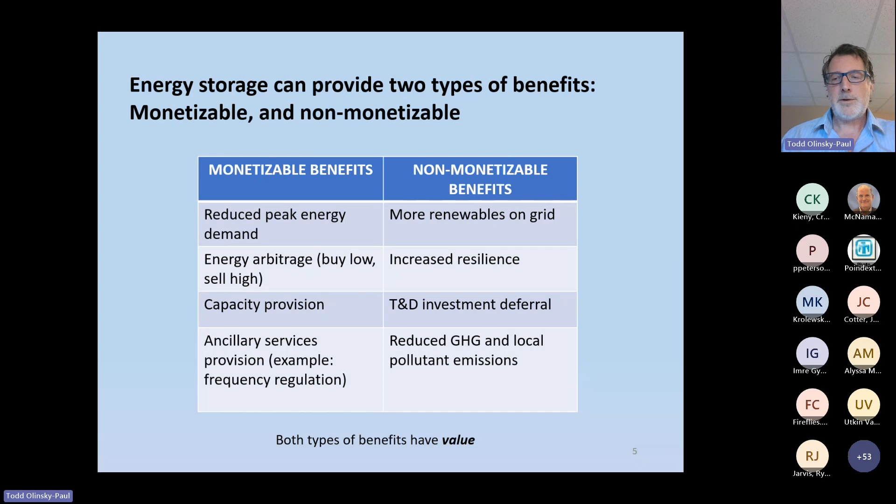The important thing here is that both types of benefits have value. Whether it's monetizable or not, it still has value. When we look at benefit cost analysis, it's important to consider all the costs and all the benefits. The problem is that when storage has lots of non-monetizable benefits, those benefits tend to get left out of the calculations.

So we know how to value some benefits better than others. It's easy to put the monetizable benefits on your cost-benefit balance scale, but it's also unfortunately easy to leave off the ones you don't know how to monetize and you're not sure what the price should be. So we need to understand that value doesn't equal price, and that failing to assign values to non-monetizable benefits is the same as assigning them a value of zero.

In other words, when you do a cost-benefit analysis or calculation—and this is usually done when you are looking at whether to adopt new programs and policies—you want to know whether your tax money or your ratepayer money is being spent wisely. So you do a cost-benefit analysis.

If you don't assign a value to those non-monetizable benefits, then they default to zero in that analysis. So a low estimated value is better than no value at all.

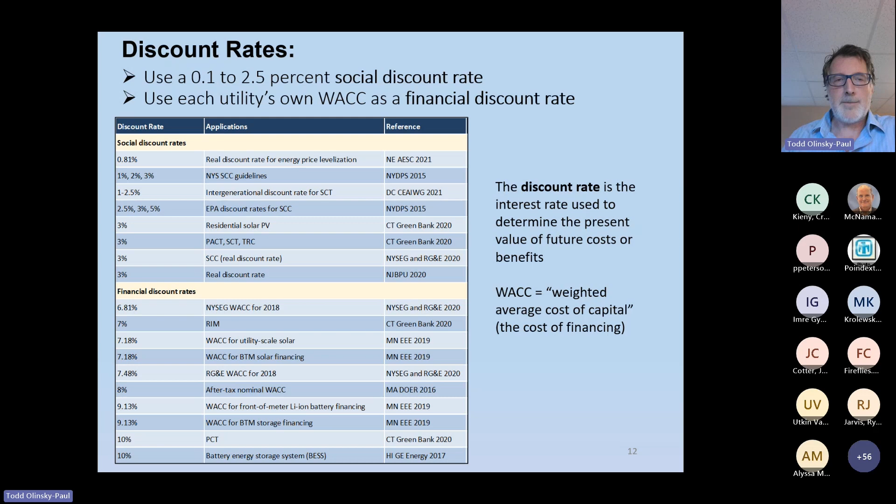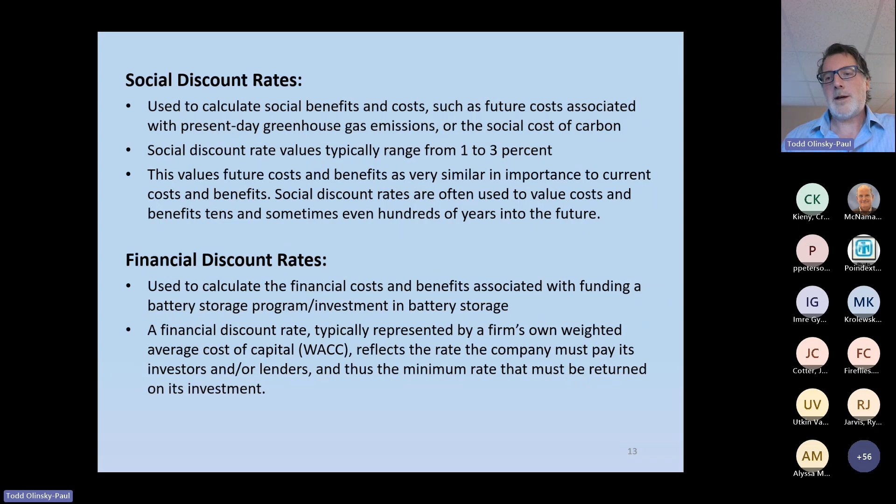Here's a little summary of what each of these entails. Social discount rates are usually used to value costs and benefits in 10, 20-year increments, even hundreds of years into the future, while financial discount rates are generally represented by a weighted average cost of capital. It reflects the cost of financing, which relates to what utilities need to consider if they're an investor-owned utility. I'll leave it there for this topic. If you need to get into the weeds on this, I'd be happy to answer questions, and I can refer you to the report, which has a lot more detail than I can get into right now.

Benefits to be considered. ACEEE came up with a list of 25 benefits of battery storage, falling into various categories. There are consumer benefits, such as lower ratepayer bills and lower customer energy use. There are avoided system cost benefits, including avoided capacity costs, avoided transmission and distribution costs, and ancillary services costs. There are environmental benefits, such as reduced land footprint. If you're displacing peaker plant services by deploying battery storage, and you're able to put the battery storage into existing facilities, your footprint there is pretty much nothing, as opposed to a peaker plant's footprint.

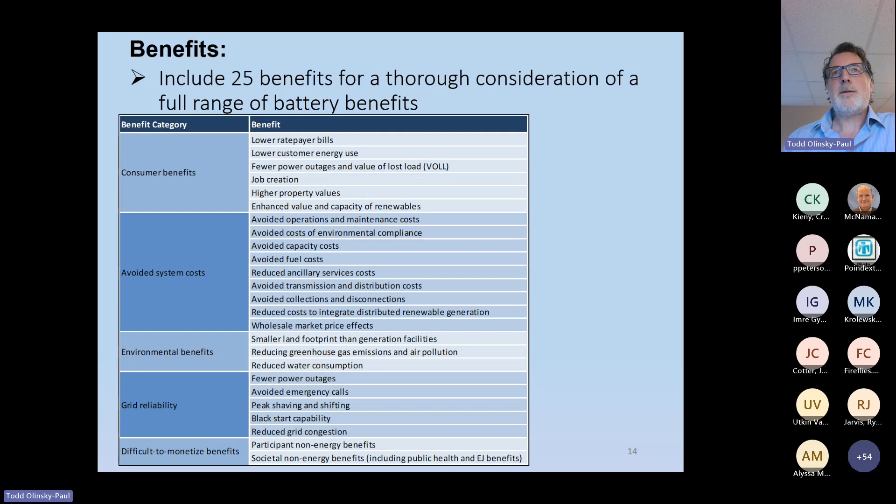There are grid reliability services, things like reduced power outages and avoided emergency calls. And then there are difficult-to-monetize benefits, including participant non-energy benefits and societal non-energy benefits, such as public health and environmental justice benefits. You're going to have different benefits considered in different tests. You may be able to pick and choose which benefits you think would be appropriate to consider. The recommendation here is to include as many of the benefits as you can, even if there's not a price signal and you're not sure what the value is. It's still important to include those benefits as well as all the costs.

So the costs. The basic recommendation here is to use up-to-date battery-specific engineering references to establish correct program costs. There are different kinds of costs: administrative costs, capital and labor costs, program operation costs. I won't get too much into this. The cost side is usually a lot easier to quantify than the benefit side, because we know what labor is going to cost and what administration is going to cost and so forth. It's a lot harder to figure out how to value, for example, environmental justice benefits, but it's important to try.

Sensitivity analysis. A battery-related benefit cost analysis should conduct several sensitivity analyses for two things. One is model calibration, which is to fine-tune the model results based on adjustments to input assumptions. The other is the full model results to capture uncertainty. Sensitivity analysis tells us how sensitive your analysis is to the assumptions you're making, and allows you to weight various inputs and so forth.

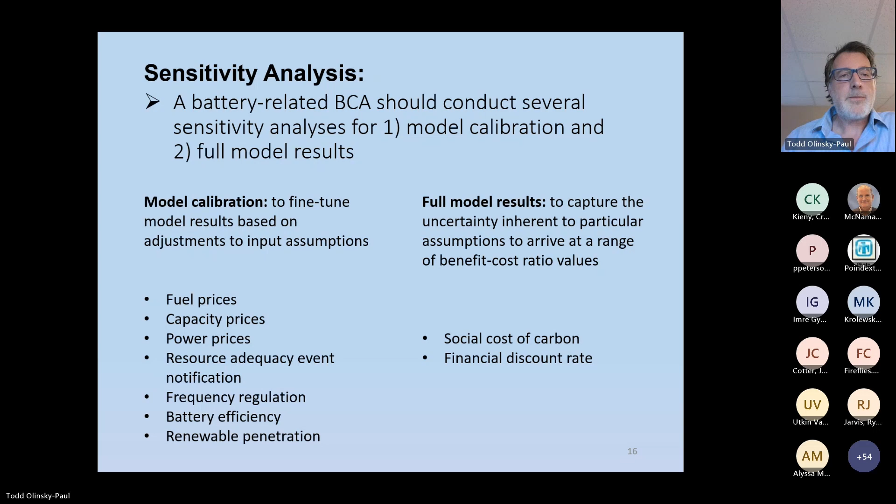Finally, the stakeholder process. It needs to be inclusive, diverse, and equitable. It needs to be a start-to-finish stakeholder process during the benefit cost analysis, and should include representatives from a wide range of stakeholders. This is important because it can really help identify battery performance information, data, market drivers, deployment barriers, develop appropriate peak load forecasts, costs and benefits, etc. The more voices you have at the table early on, the better off you will be.

So here's a summary of the recommendations. I won't go through this since I just did.

So I'll talk a little bit about energy storage applications first. We typically categorize it into two categories: power and energy applications. For power applications, we generally demand a huge amount of energy in a really short time from the storage—those are the power applications. Some of the more common power applications are frequency regulation and voltage support. I'll talk a little bit about each of these applications first.

Frequency regulation: due to the constant variation in load and sometimes generation, the frequency of the grid fluctuates continuously, so we have to regulate that. We have to keep it as close to the nominal value of 60 hertz. So we can use storage to do the regulation.

Then voltage support—we also want to keep the nominal voltage of the system close to the 1 per unit value, and storage helps with that. Then there's small signal stability, where if there are small disturbances in the system, the storage can step in, provide active power and balance that out. Then renewable smoothing, the storage helps in mitigating the variability of renewable resources like wind and solar.

Then there are the energy applications where we ask the storage to provide us with energy for a long period of time. Energy arbitrage is one of those, where you recharge your storage during periods of low demand when the cost of electricity is lower, and then during periods of high demand, you discharge it.

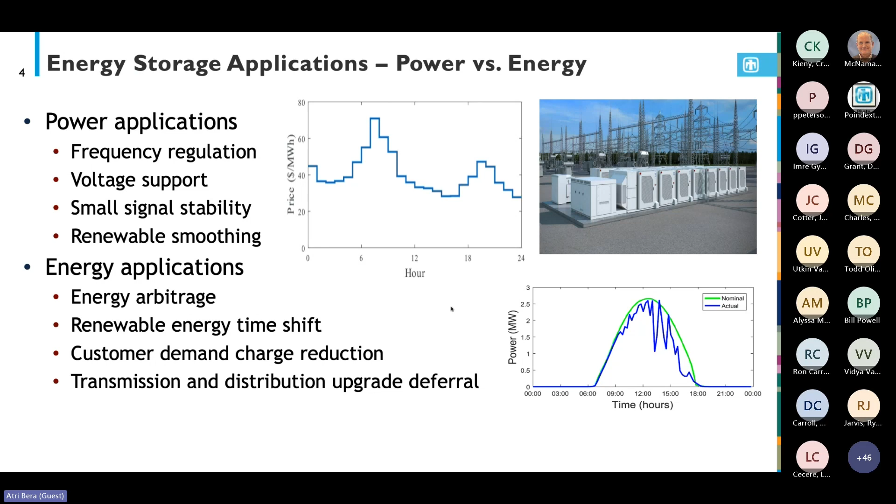Transmission and distribution upgrade deferral: sometimes it's not economically feasible, or we have other issues for building new transmission and distribution lines, so we can use storage during that period. We can also categorize energy storage applications as front of meter or behind the meter, based on the location of the storage in the grid.

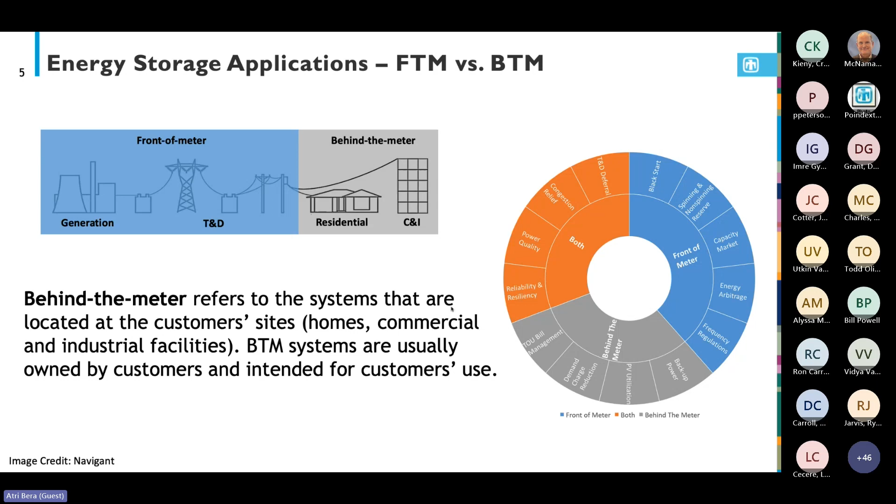So how do we go about doing the techno-economic analysis of energy storage? The first step is to identify revenue streams: what are the possible services or applications that an energy storage system can provide in a particular market? Then we select the right energy storage technology to provide these services, and evaluate the overall economic benefits given the limits in performance of the selected storage technology.

One of these is energy storage selection. The goal is, given a set of user inputs, we perform an initial screening to identify and rank feasible energy storage technologies for a given project. For example, the user input might be the grid location, application, system size, and discharge duration.

When we have these user inputs, we look into the energy storage technologies database that we have. Currently, for the technologies, we have several electromechanical storage systems like pumped hydro storage, compressed air energy storage, flywheels, and electrochemical batteries - sodium, zinc, flow, lithium, nickel, and lead batteries. We look at different parameters of these technologies like discharge duration, round trip efficiency, cycle life, depth of discharge, response time to full power, cost, and maturity level.

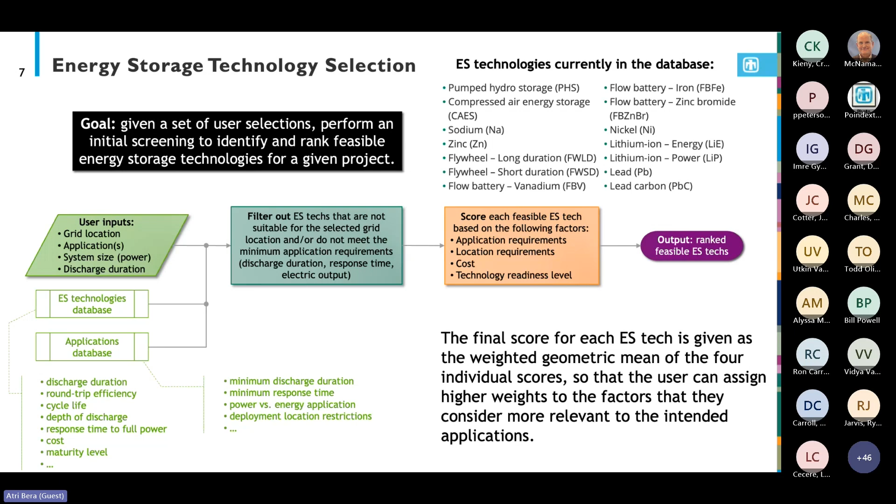So this particular Quest application filters those out, and of the remaining technologies, it scores each feasible energy storage technology based on several factors like application requirements, location requirements, cost, and technology readiness level, and ranks them according to the scores received. These final scores are calculated as a weighted geometric mean of these individual scores, and the user can also put higher or lower weights on these factors based on the importance they place on them.

Another important application that Quest can do is energy storage valuation. Given an energy storage device and an electricity market with a certain payment structure, how would the device maximize the revenue generated and provide value? Todd mentioned a lot of the factors that we should consider.

And there are several constraints that we have to put into place. First is the state of charge constraint, where we track the state of charge of the storage at every time period. If the storage discharges, then we reduce the state of charge; if it charges, then we increase it. We also put in state of charge limits, so we don't typically discharge the storage system completely or charge it to 100%.

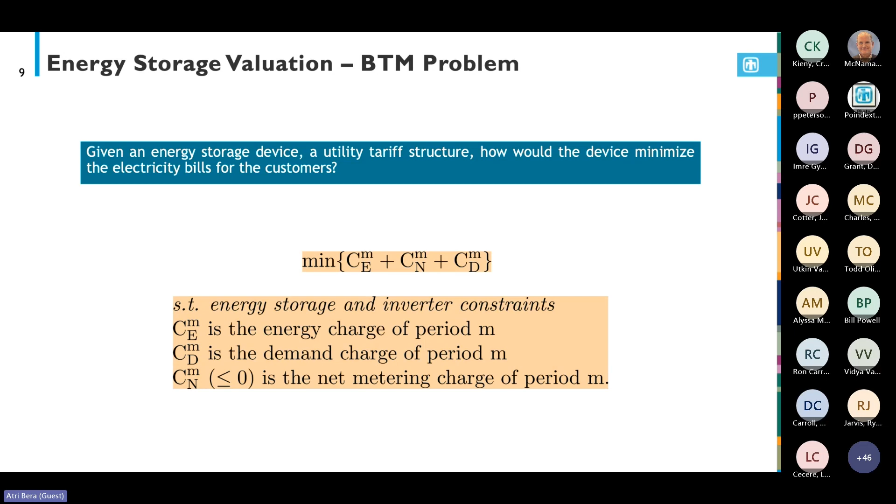There are two other applications I'm going to briefly mention: one is Quest Equity, and the other is Quest Performance, system performance. For Quest Equity, the problem statement is: given a peaker loading profile, what are the optimal sizes of PV and storage for a 1:1 replacement of that plant, and what are the benefits for the environment?

This tool, the Quest Equity tool, is currently under development. We have an alpha release, but we have not released it to the public yet, though it will be out soon. For performance, it's already a part of Quest, and you can use it right now if you want.

Given a charge discharge profile of a battery energy storage system, how much energy is needed to run the HVAC that maintains system temperature within its operating range? What is the optimal size of the storage considering the HVAC load? These are some of the things we try to answer with this application.

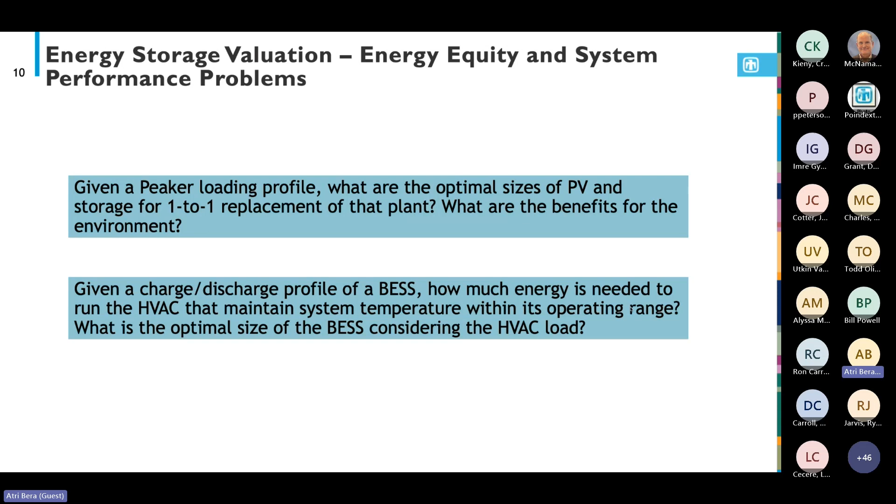Now that I've explained the models behind Quest, I'm going to talk about the tool itself, the platform, the graphical user interface, etc.

There are two versions of Quest right now, or one version but different installation processes. One is very user-friendly, hassle-free installation where you just go to our GitHub repository and download a zip file. If you extract the executable, you just double click on it and land on the home page, and that's about it. Then you can use the tool whichever way you want.

For power users, if you're proficient in Python and want to customize the programs or add more features to the existing code base, you can do that too. There's also a Python library we are working on, which is coming soon as well.

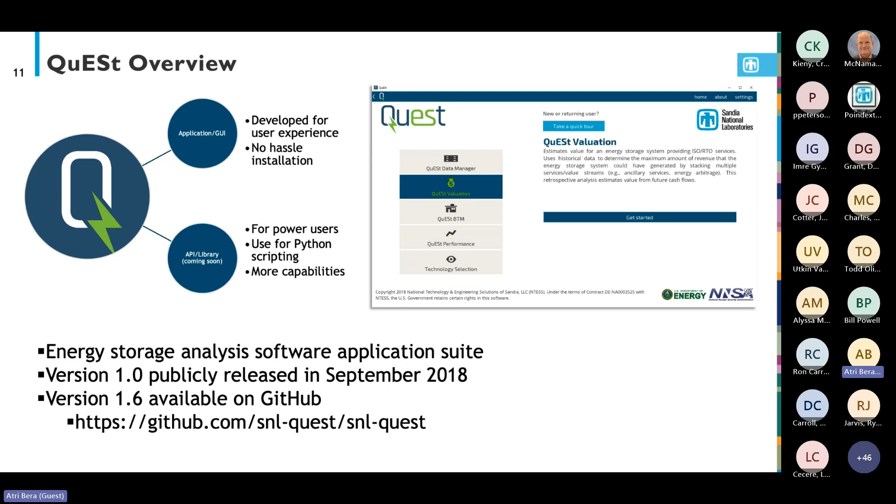A little history: version 1.0 was publicly released in September 2018, and the current version is 1.6, available on GitHub. I believe this link is not up to date because our entire repository was moved to the Sandia Labs repository—we don't have a separate SNL Quest repository anymore. I'll update the slides before Dylan uploads them to the website.

What are the current applications that Quest supports? I've already talked about this a little, but in the GUI you can see all these different applications. Quest Data Manager manages the acquisition of data, which can include ISO and RTO data, utility rate structures, PV profiles, load profiles, etc. Quest Valuation estimates potential revenue generated by storage by providing ancillary energy services in the markets.

We have Quest Behind the Meter, which estimates cost savings for time of use and net energy metering customers, Quest Technology Selection, and Quest Performance. The next releases would be Quest Equity and Quest Microgrid, where you should be able to size storage for microgrid reliability applications, voltage support, and several other things. These are all currently being developed.

So this is how a typical Quest workflow would look like. First, you decide what type of analysis you want to do. It can be valuation or behind the meter or others. Then you have to grab the appropriate data from Quest Data Manager, the RTO utility data or PV and load profiles, and then you select the application from the first step and use the data to run your analysis.

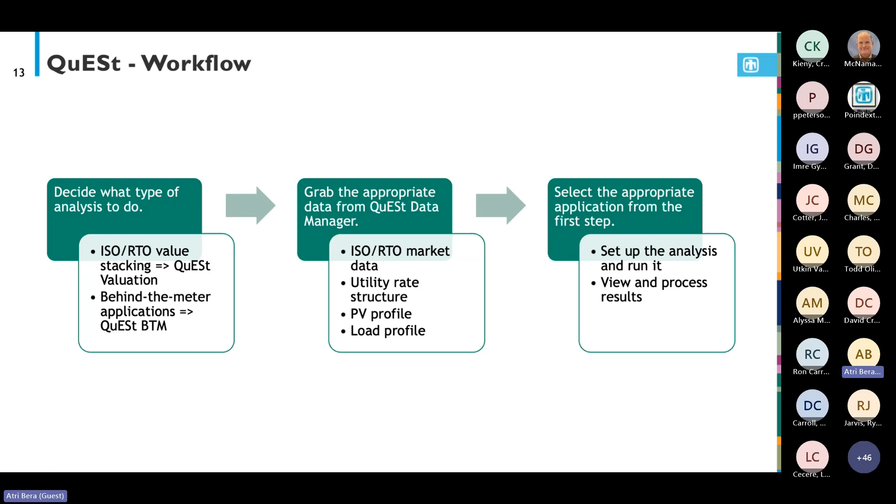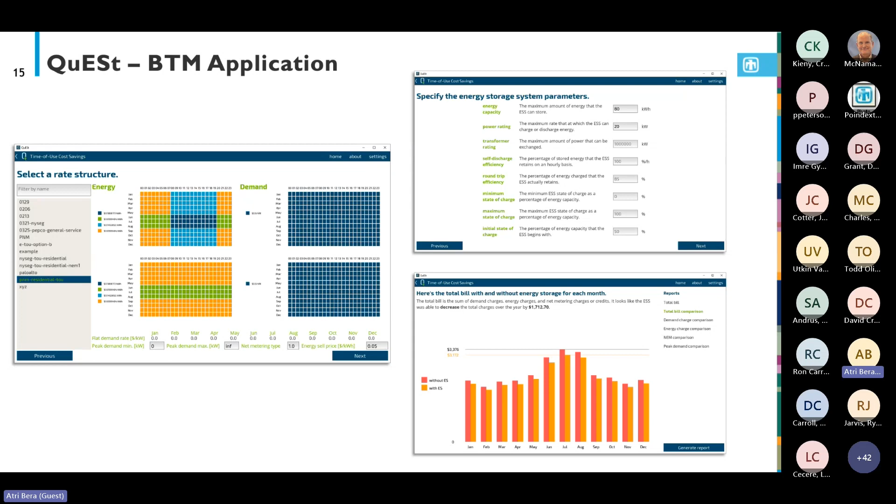So those were some examples, and currently QuESt is undergoing a large overhaul. We are moving towards QuESt 2.0, which will be more like a software platform rather than one solid software. This can be comparable to an app store for Apple or Android phones, where you install only the applications that you need. You don't install the whole software. So if you just need to do technology selection, you install that, or performance, you install that.

There are several reasons why we are moving to this structure. The Python platforms we were using in the past were not that good. We are moving to better packages now, and also through our experience we understood that it's better to separate out all the applications. It just makes the app more user friendly and glitch free.

So like I mentioned, the app hub would work more like an app store that provides access points to multiple apps. We will also have a workspace where you can use multiple apps, and you can build a pipeline using the different applications. Let's say you need to select the technology, and then you do a performance or a storage evaluation. You can build a pipeline using these two apps, and then get results for that. We will also have a QuESt GPT, which will be similar to ChatGPT, that can be used for data analytics and characterization and visualization of large data sets that you might want to input into the QuESt tool.

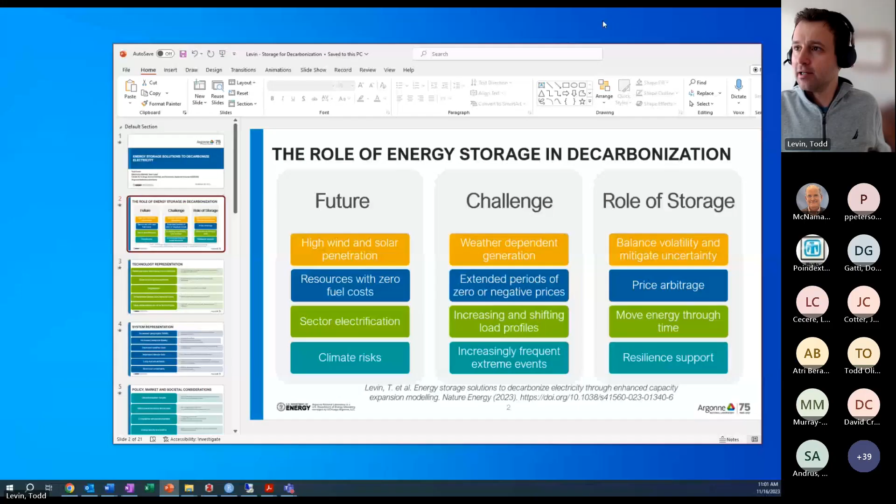Okay, feel free to share your screen, and the floor is yours. Give me just a second to get that pulled up here. Oops, sorry, that was the wrong window. Nope, sorry about that. Let's see, it's wanting to share. There we go, okay. All right, is that coming through okay? Yeah, looks good, thank you. All right, great.

So thanks everybody. Yeah, I'm gonna talk through a couple of ongoing activities. My name is Todd Levin, I'm the electricity markets team lead at Argonne National Laboratory. I'm also being called in to pinch hit a little bit here, so I hope this presentation is useful.

It's going to provide a little bit of an overview of some different energy storage activities at Argonne, in the context of understanding the role of energy storage in supporting electricity system decarbonization. So we have a few different studies, a few different methodologies we're working on, and some preliminary results that I can show to demonstrate the direction we're headed, and some final results as well for a few studies.

So let me get into it. The background and motivation behind a lot of this work is summarized in a paper we just put out in Nature Energy, Energy Storage Solutions to Decarbonize Electricity. We categorized a number of challenges and opportunities related to capturing the value of energy storage in the types of traditional capacity expansion and production cost type tools that are used to inform system planning, IRPs, and that sort of thing.

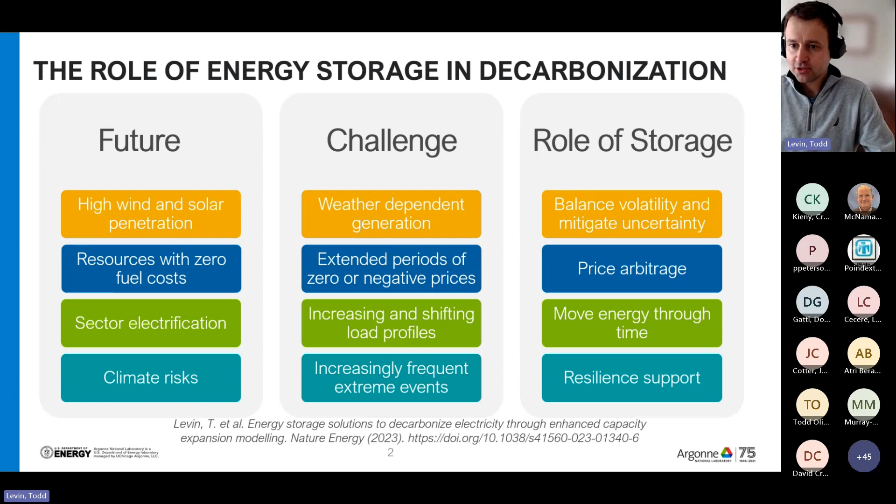On the system side, and I'm going to talk a little bit more about this in some of my future slides, making sure that you're capturing appropriate both geographic and temporal resolution to really get at the value, the localized value of storage, and the temporal, sub-hourly potential value of storage. Balancing those dimensions isn't always captured in traditional modeling.

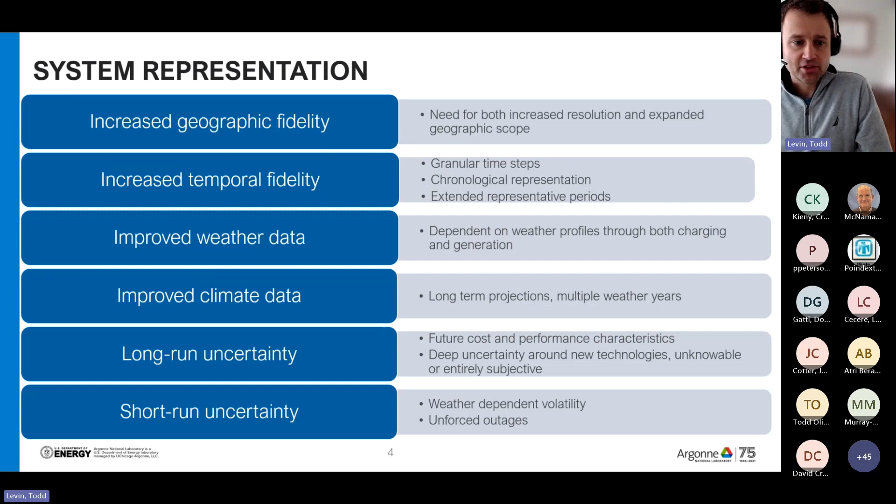I'll talk later about improving weather and climate data to make sure you're capturing future conditions and also the volatility, where that creates opportunities for storage. And then on the policy, markets, societal side, decarbonization targets are a big undertone to a lot of the work we're doing.

Nearly 75% of Americans are served by an electric utility with at least a soft or voluntary target to decarbonize fully at some point in the future. What is the role of storage in enabling that future? A lot of those targets or standards don't explicitly incentivize or support storage, but there's certainly a role there. So what's the intersection between storage and those policies, and how do we capture that value in models?

Similarly, there's the role in competitive wholesale markets and making sure that the service value is monetized. Some issues around heterogeneous policy landscapes where you have different state policies operating within a single system, and how do you square those, or there might be inconsistencies that create challenges for how the system is operated.

All right, so I'm going to now just step through this. This will be a little bit of a quick run through, but a couple of ongoing activities.

So we have one study that we're working on currently to look at the role of storage, and particularly longer duration energy storage, in the national decarbonization or deep decarbonization pathways. To this end, we're using a tool at Argonne called the Argonne Low Carbon Electricity Analysis Framework.

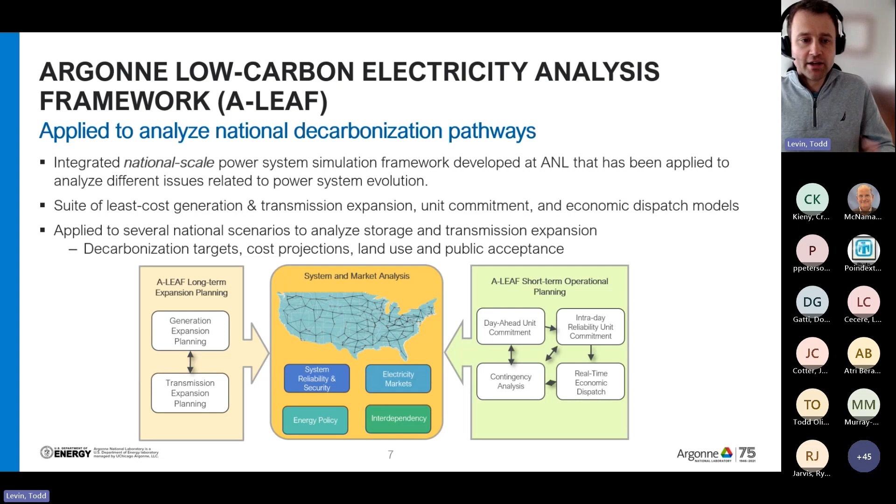So what we are doing is looking at a couple of different decarbonization pathways, broadly across two different dimensions: technology costs, and the public acceptance of land use. What that does is it affects the ability to have transmission expansion, and also limits the availability of wind and solar capacity, assuming higher or lower tolerance for land use for decarbonization.

But the key thing to highlight is the trend we're seeing: if you're limiting the amount of land that can be used for transmission expansion for wind and solar, it creates more incentives for storage. You're not able to transport energy as freely. Maybe you can't put as much wind or solar capacity in the really high availability regions as you would like, and so there's much more benefit to having localized storage to provide transmission-like services.

Similarly, looking at the role of storage as you get deeper and deeper into decarbonization, we have a couple scenarios: no reduction, no firm cap on national emissions, then going to a 90% reduction based on, I think, the standard 2005 baseline, or 100% reduction. And you can see, especially going to that last 10%, a greatly increased role of storage under these four different cases.

Even more so with limited land use and low cost, you see much more, decreasing from there. But this last 10% - and there have been other studies that show similar effects - it can be very challenging to accomplish, and there's a significant role for storage in helping to achieve that.

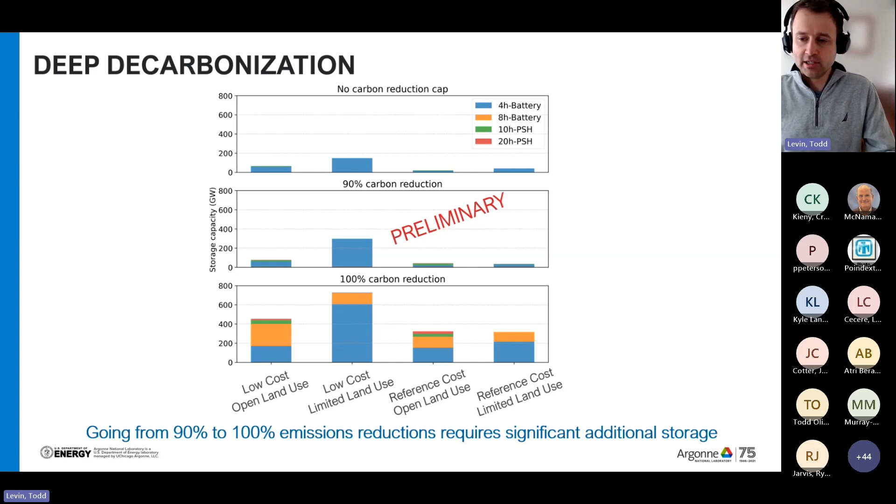So again, this is work in progress. We're hoping to finalize and publish soon, so keep an eye out for final results coming there.

Another thing I highlighted that is important is higher fidelity, potentially higher temporal fidelity capacity expansion modeling. This is really looking to capture chronological hourly implications, so every hour in a day, for example, rather than some more traditional methods that might just sample a subset of hours.

In a day or over the course of a year, and even looking at sub-hourly dispatch intervals. This work is finalized and currently under review and revision, and should hopefully be published soon. There's a preprint available online for those interested on SSRN.

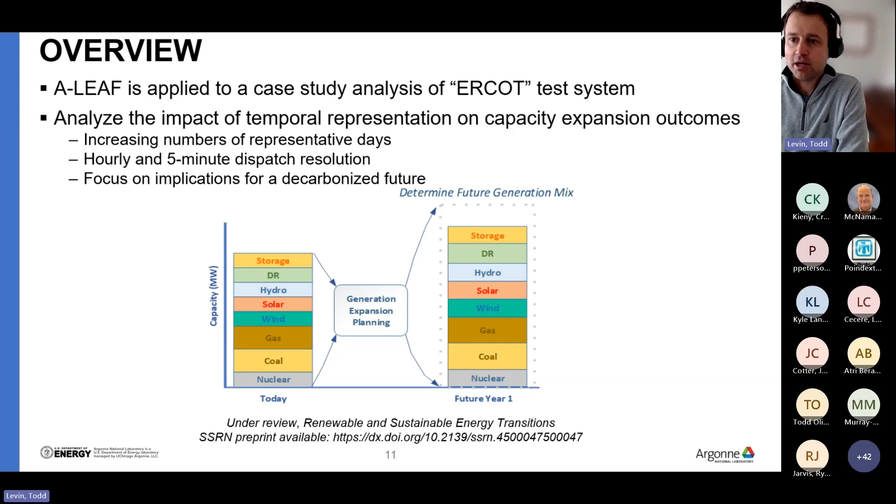So what we did here is look at impacts of temporal sampling and how that affects the perceived value of storage in a model, both in terms of the number of days considered to represent the entire year, as well as whether you're considering hourly or 5-minute dispatch intervals. We used A-LEAF, our in-house modeling tool, so a couple of quick implications that are relevant for storage.

As you increase the number of days used to sample the entire year, the key finding is that there's a fair amount of volatility in your optimal least-cost expansion portfolio for lower numbers of days. Notably, there can be a fairly large jump when you add a specific new day to the system that has certain operating parameters not captured previously. These results aren't global and won't apply universally to every model or system, but we think some of these trends and the volatility with lower temporal fidelity modeling are important.

The key takeaway here is that modelers and decision makers should do some sensitivity analysis around how they're representing the temporal dimension in their modeling.

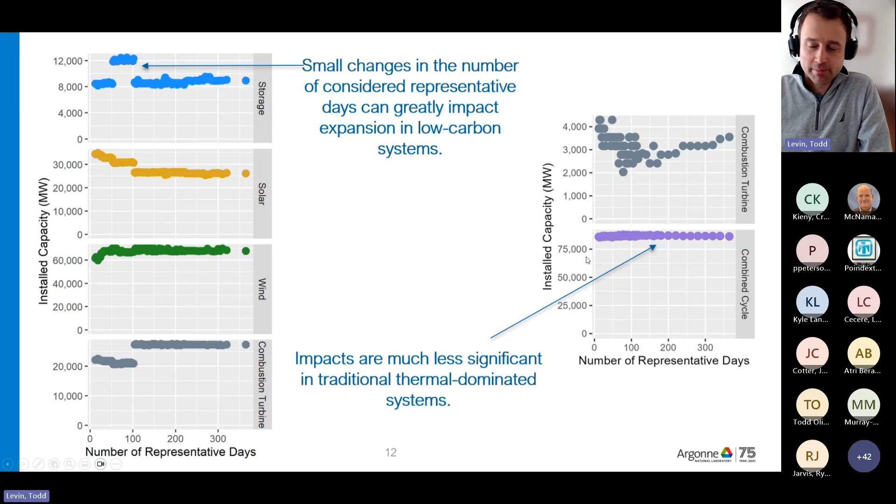Contrasting this, we ran a null case, a very hypothetical, entirely thermal system with no solar or storage. The takeaway is that those systems are much less sensitive to your number of days, how you represent your year, and both the number and choice of days. The messaging here is that methods we've traditionally used for thermal-dominated systems are becoming less appropriate in systems with wind, solar, and storage.

Similarly, we looked at the impact of representing 5-minute dispatch intervals instead of hourly. What that means is you're actually capturing sub-hourly, primarily solar volatility and uncertainty in your models, which creates opportunities and balancing needs for storage. These models are much harder to solve, so we were able to include fewer sets of representative days.

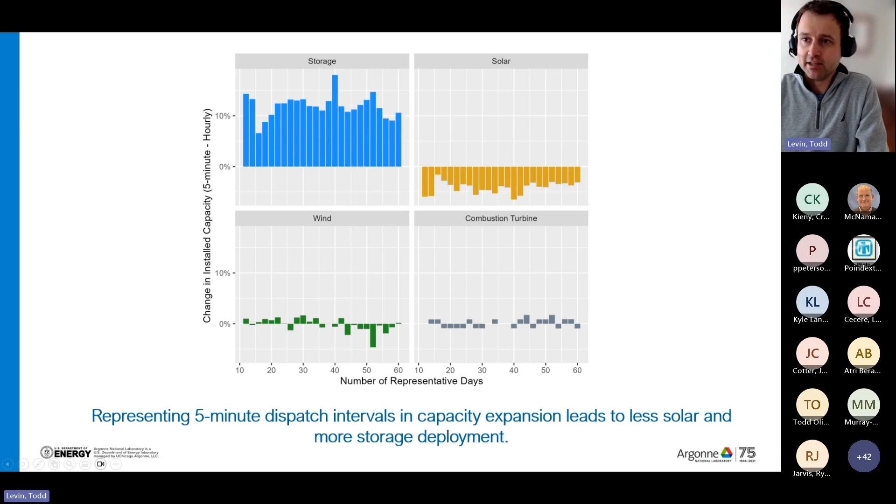But we found this universal trend that when looking at 5-minute dispatch as opposed to hourly, there is more storage being built in the system to help provide that sub-hourly balancing, and slightly less solar capacity is built, with storage filling in those gaps to help balance the volatility. I think that's an important finding. It's not always practical to conduct or consider 5-minute intervals in capacity expansion modeling, but it's an important consideration for folks doing these types of studies.

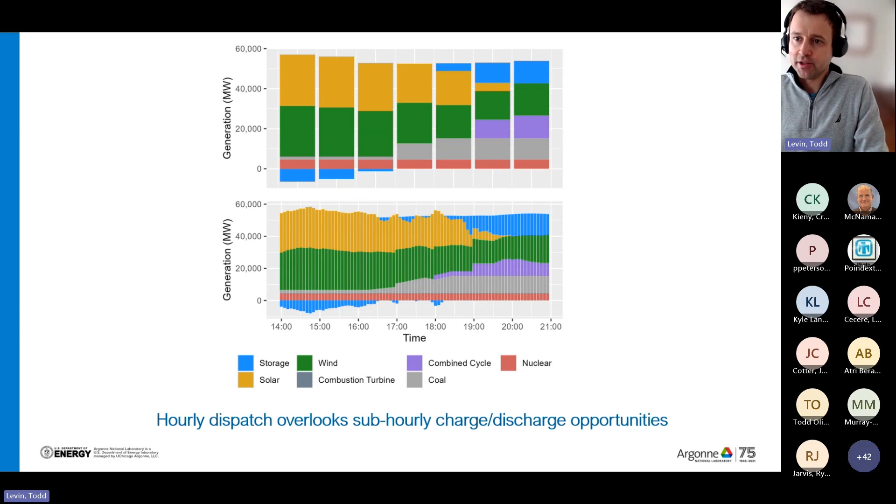The last thing I want to touch on is our work on climate-informed capacity expansion, and looking at the implications for storage under future climate conditions. I don't have many concrete results to show, but I want to highlight the importance of this work. I think it's key that climate and weather, especially in systems with wind and solar capacity—which is the case today and will be more and more the case tomorrow—those conditions are increasingly important to how you plan and operate your systems. There's a lot of evidence that extreme weather events are occurring more frequently with more severity.

Traditional modeling relies on historical weather conditions and a persistence approach, assuming they'll be roughly similar in the future. That may not be appropriate anymore.

So in this project, we're pulling data from climate models that's been downscaled to 12 by 12 kilometer resolutions. This is coming from the environmental science folks at Argonne who do detailed climate work in this area. They have tons of data, close to a petabyte, related to different weather variables and future projections.

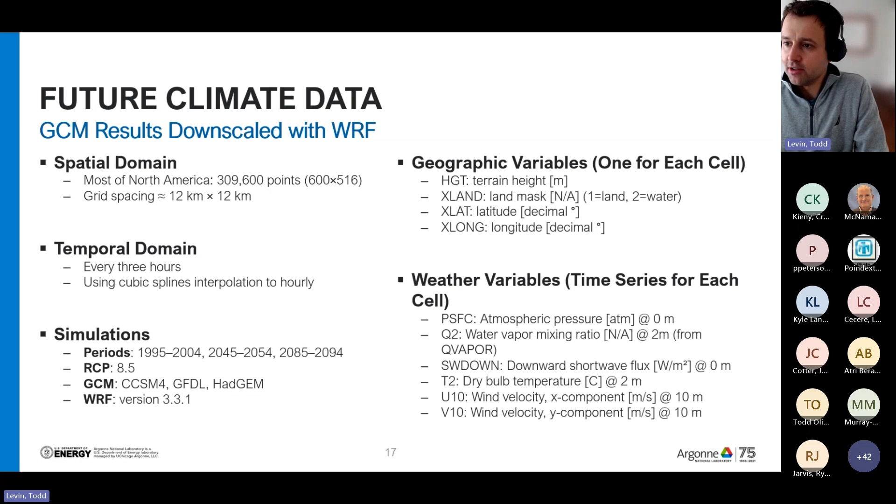What we're doing is trying to translate those raw weather variables, identify which ones are important and influence grid planning decisions, and translate them into the types of inputs used in planning models for the grid—key ones being temperature, global irradiance for solar, wind speeds, and things to that effect.

Actually for long-term planning, we're definitely interested in these types of conditions, but maybe more impactful to planning decisions are prolonged periods of intermediate conditions—like week-long periods of very high temperatures in the Southwest or Texas that we've been seeing in recent years, which are only going to get more pronounced.

Those might have more implications for, say, longer duration storage technologies, where you really need multiple days of storage to support the system through those types of periods.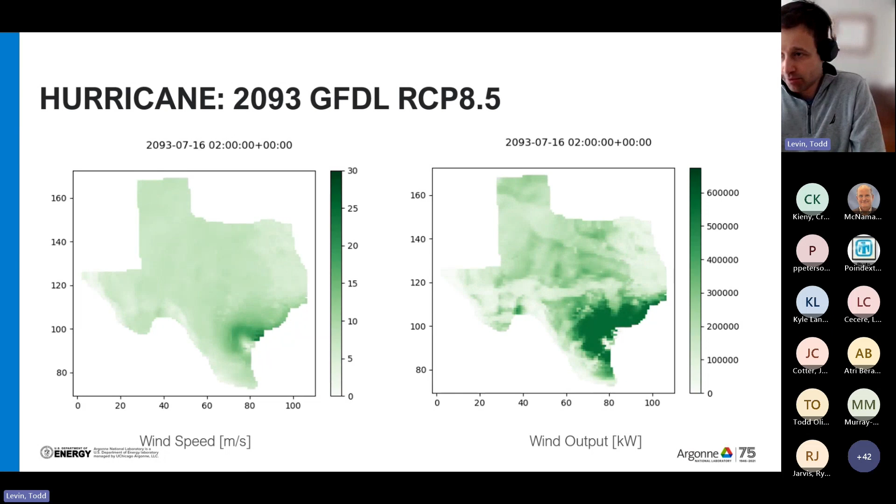Getting a little deeper into methodologies, what we're planning to do is incorporate some of this data into our models, develop a more updated approach for selecting the representative periods we use to capture future conditions, and conduct more stochastic, probabilistic modeling to understand the implications in the future—again specifically looking at different long duration energy storage technologies.

So stay tuned for more on this. There's a lot going on in this field, both at Argonne and a number of other labs I know are heavily involved in this as well.

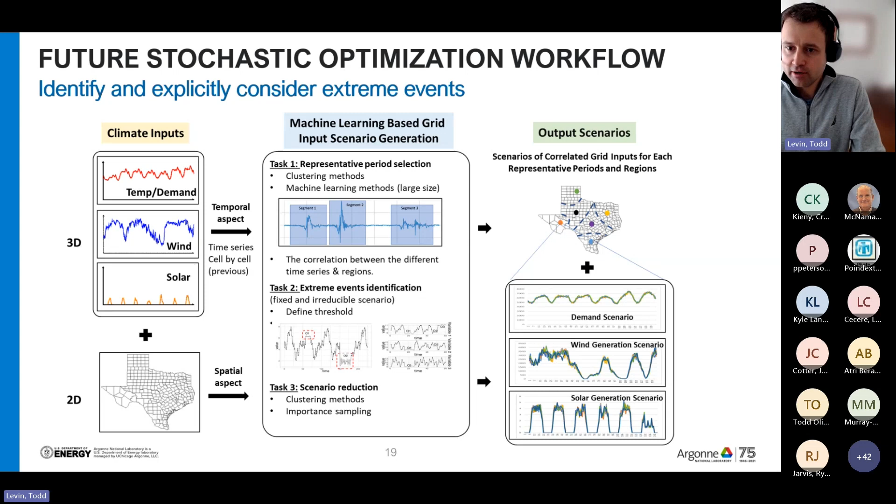And that's all I had prepared today. So it's a bit of a whirlwind—I think I just about stuck to my 15 minutes. But happy to answer any questions or provide more info offline if that's helpful.

Awesome, thank you so much Todd, that was a great presentation. Good job on time too. Thank you for that. We're running a little bit ahead of schedule, so we'll take some time to do some questions here in the chat.

Looks like I got one from Brian Evans Mangion from the village of Hyde Park, who asks: has your group looked into any aspects for power accounting within ISO markets when charging and discharging uses occur, or as to how such uses will be treated in renewable or clean energy requirements?

So let's see, accounting—I might need a little clarification. Is the question about how the charging and discharging of storage accounts towards clean energy requirements, or how it's netted out? I'm not quite sure I'm following, but Brian, if you're on the line, feel free to come off mute and clarify if you don't mind. Oh, here's the question.

Power accounting. So I think, in terms of how storage is treated for renewable and clean energy requirements, generally, the act of charging or discharging is not counted. What matters is what energy is being used to charge. So if storage is charged from excess solar capacity, it means that solar generation is happening and it's being moved through time to a later period. I don't think it's necessarily counted when the storage is dispatched in the later period, if I'm understanding correctly.

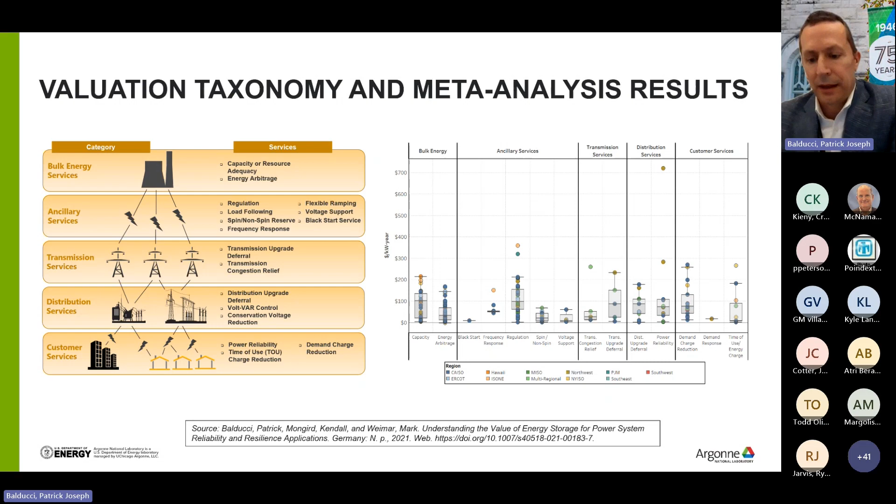Okay, so some of the challenges to accurately estimating economic benefits of energy storage: there is multi-dimensional competition for the energy in an energy storage device. If you offer it in one hour, there's less of it available in the next. And of course, you cannot satisfy all of the requirements of all of the services simultaneously. And so when determining the value of energy storage, you need sophisticated models that can simulate the co-optimization of services subject to the technical limitations of the energy storage systems.

You cannot serve all services simultaneously. So effectively, optimization algorithms are used to determine which service is highest value, and then how you effectively operate between those services over time, while accounting for the value of meeting all the needs of those services, either as defined by the market or by the grid system itself.

There are a lot of challenges in doing this, and of course, when you're dealing with these valuation tools, things like perfect foresight of future systems can lead to overstatement of the benefits. And if it's a large-scale energy storage system, you would influence prices within that market. So there are now market simulation tools and price influence or system simulation models that can be deployed to create more realistic estimates. Also, advanced statistical techniques for bidding the system into the simulated environment can be used to acquire more realistic estimates.

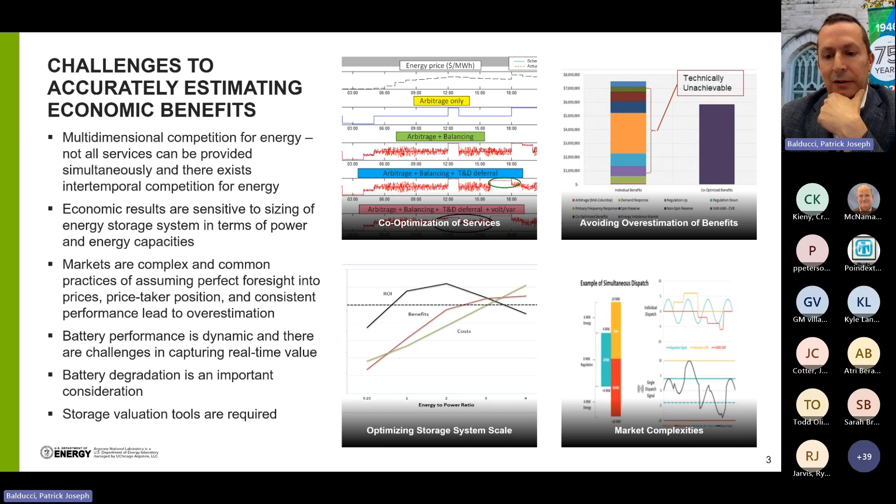Some of the simple use cases, the value streams: capacity or resource adequacy. In most parts of the country, there are forward capacity markets into which you can bid, and then effectively the system must be there and available for providing typically up to 4 hours of continuous service during those peak periods, and for that you're paid a fairly significant amount of funding. It's based on the cost of a new entrant, typically a peaking combustion turbine, with adjustments for the flexibility benefits of that turbine, and then also the incremental capacity equivalent of the energy storage system.

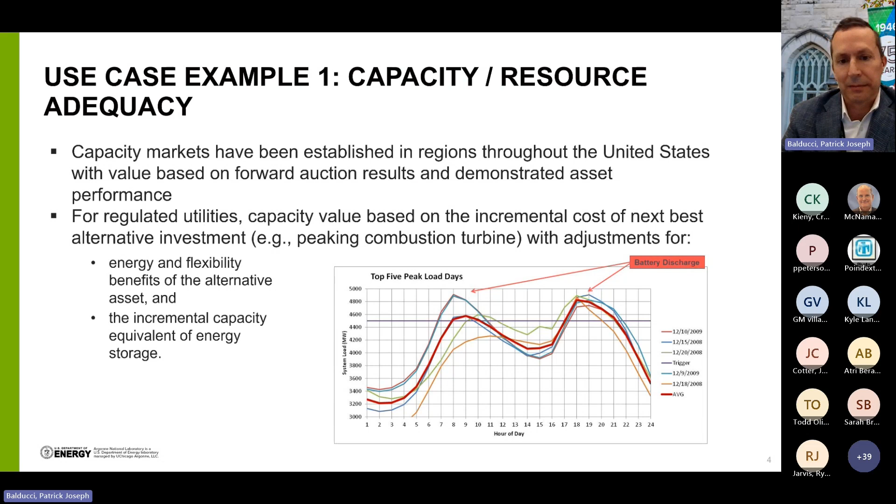So if the value of the service is roughly, let's say, $50 per kilowatt per year, and you're operating it with a 2-hour system, you would be dividing that value in half effectively, because you have to provide 4 hours of continuous service.

Frequency regulation. This is the second-by-second adjustment in output power to maintain grid frequency. There are three components to it. Capacity, so you're bidding in a regulation capacity clearing price. Mileage, so as you can see in the chart, as you cycle energy into and out of the battery, and the battery set point shifts up and down, those green bars, the sum of those green bars form what's called a service payment or a mileage payment, and that drives an outcome as well.

And then finally, battery storage systems receive, as all those who bid into this market receive, a performance score. Battery systems score very high typically, and so you retain much of the value that you acquire through the provision of this service, whereas some generators and assets that perform less well will face a more significant deration.

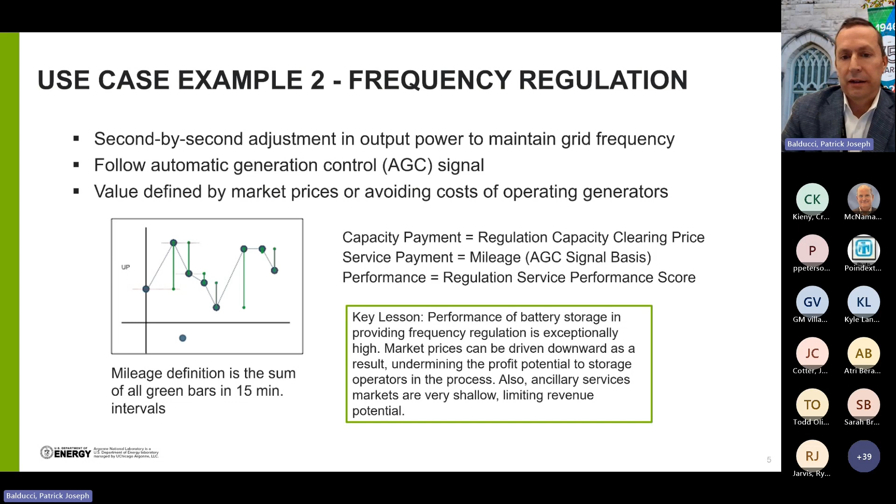What we found in PJM and some other markets is that when significant energy storage is bid into the market, they perform at a very high level. Their ability to actually satisfy the requirements of this market and accurately follow the signal is exceptional. And in so doing, they generate value to the grid, but actually undermine their ability to obtain revenue because the market can actually crash as the requirements for this service are satisfied by the battery systems. So it's important to understand some of the variability in the future revenue potential for this. While it is a high value stream, the value stream over time is uncertain.

Another value stream for energy storage, of course, is outage mitigation. We've recently completed an analysis of the outage mitigation potential of two battery systems plus tidal energy plus community solar on the San Juan Islands in Washington State.

You can see where we segmented the island's grid. It's connected to the mainland Washington State with two submarine transmission cables into four different zones, and then matching those assets with those zones and the outages that took place. Effectively, you can island the islands in this case, and basically all you really need to define the value.

There's two levels of analytics you could employ here, but the most simple is just knowing the customer counts, knowing the loads on each of the segments that you'll be islanding, knowing the assets that'll be brought to bear, and then weaving those into an optimization tool, simulating historic outages, and then determining the value through the application of value of lost load data that we acquire through the Lawrence Berkeley National Labs interruption cost estimator, which is built on a series of interruption cost studies that they have performed.

By the simulation of these outages, you can figure out the value of lost load with and without the presence of energy storage. And the marginal value, of course, is the value that's attributed to the presence of energy storage.

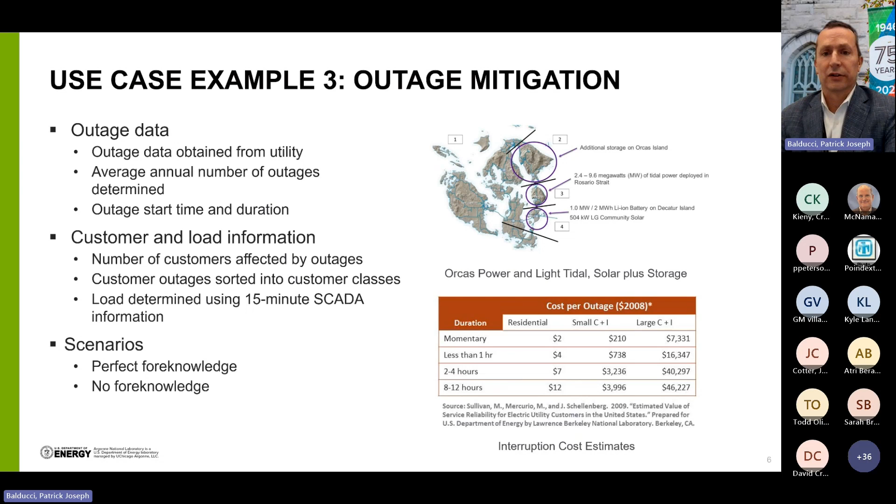Using models like OpenDSS or GridLab-D to better understand the use of energy storage for realizing those outage mitigation benefits. And when we've done that in the past, you find out that specific areas might require reconductoring or some other automated feature switching and other elements to actually generate the full value associated with outage mitigation. So those more sophisticated modeling techniques will give you that level of information.

Transmission and distribution deferral, fairly straightforward, either because of declining infrastructure or because of load growth. Investments are required at either a distribution or transmission level. From an accounting perspective, for the utility, effectively the cost of the system will be higher as you defer investment in that system into the future, but when you're discounting it back, typically in the denominator of that equation will be the weighted cost of capital, which generally speaking will be considerably higher than the inflation cost.

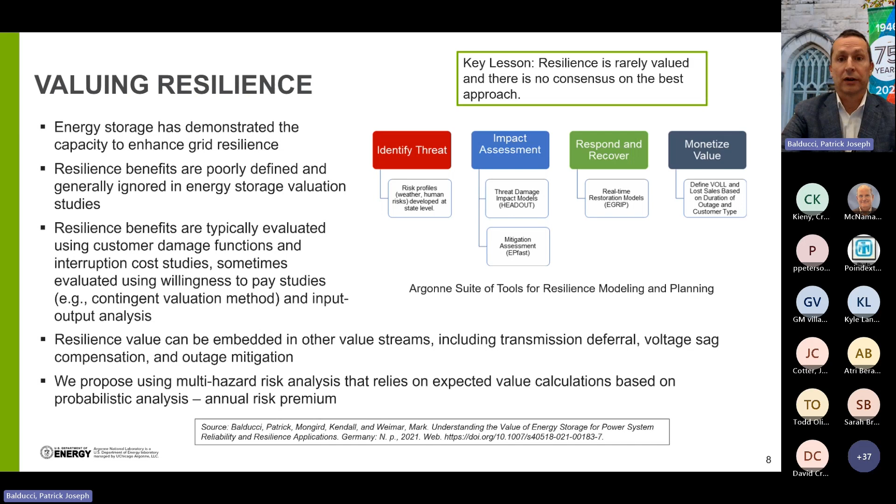And then we're going to evaluate the grid firming effects of transmission investments and long duration energy storage. So tying these together for Nantucket Island Energy Storage System, a small resident population of 11,000, but the population swells to 50,000 in summer. So the load on the island surges. It's currently connected to the mainland Massachusetts with 2 submarine transmission cables.

They were considering a third that would wind around the island and then connect at the Bunker Road substation there, at a cost of $150 to $200 million. We're employed by National Grid to evaluate the transmission deferral benefits of it, but also the benefits in terms of improved reliability and participation in the ISO New England market.

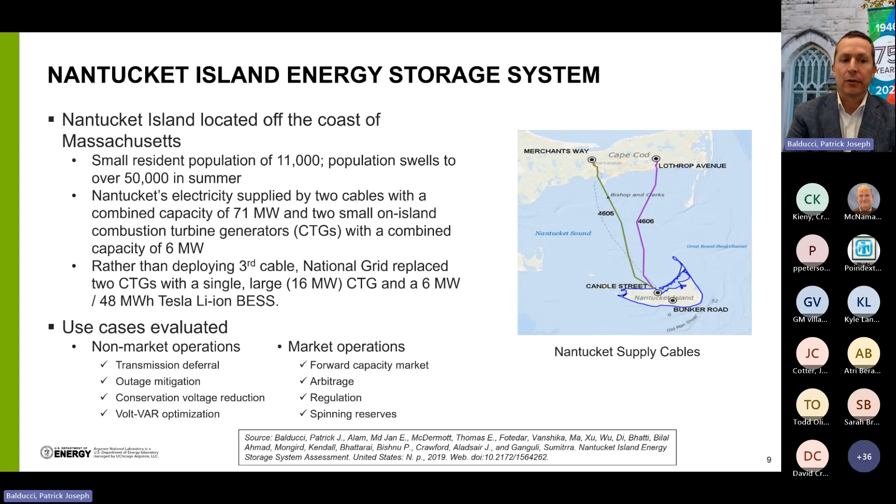And what they were investing in, instead of investing in that $150 to $200 million submarine transmission cable, they chose to invest in a combustion turbine generator, 16 megawatt is its maximum capacity, and then a 6 megawatt, 48 megawatt hour Tesla lithium ion battery energy storage system.

So we did a thorough analysis of load, sort of stressed out that load in an extreme weather event, and then forecast that load into the future to determine how long the deployment of these local assets could maintain that N-1 contingency capacity in the event of these sort of extreme load conditions. And we learned that we could reasonably expect the investment in the submarine transmission cable to be deferred by roughly 13 years.

We also performed distribution analysis. We modeled the distribution system on Nantucket Island using GridLab-D and OpenDSS, and simulated the outages that took place over an 11-year time horizon, which I believe were something like 700 outages. It was quite a significant number of outages. And from that, valued the investment in these assets.

As we did that, we uncovered the need to make additional investments in the distribution system, and we could show the marginal positive value of making those investments and wove those into the analysis as well.

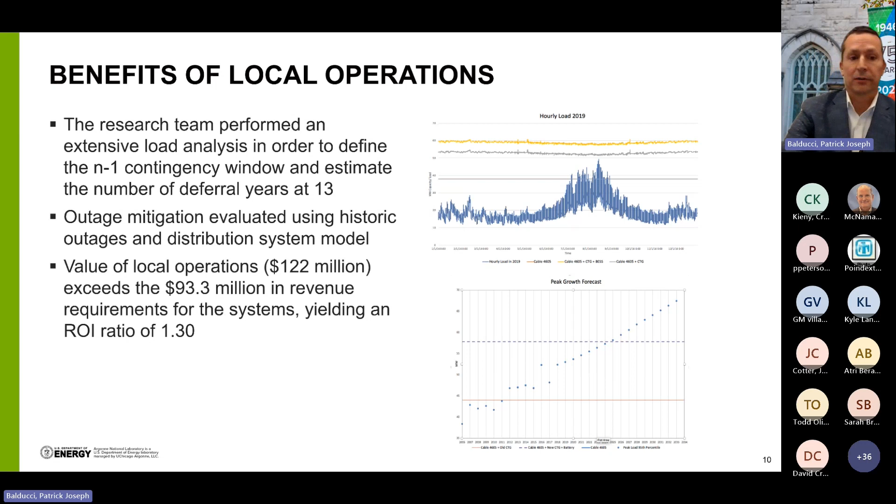And you can see the value of local operations being estimated at about 122 million, which that alone exceeded the revenue requirements for the CTG and the energy storage system, which was $93.3 million.

We then simulated market operations using the continuous storage facility option for ISO New England. Rather than assuming perfect foreknowledge, we built in using a small number of statistical techniques and evaluated each of them, and then settled on one. I think we used the gradient boosting machine method, but we also evaluated the ARIMA method as well.

And so what our model was doing was simulating market operations, and then first bidding into the market, and then settling in terms of the value based on the actual market prices. So we used historic market prices, but effectively extracted that perfect foreknowledge problem by modeling it as though we were bidding into those prices without any foreknowledge.

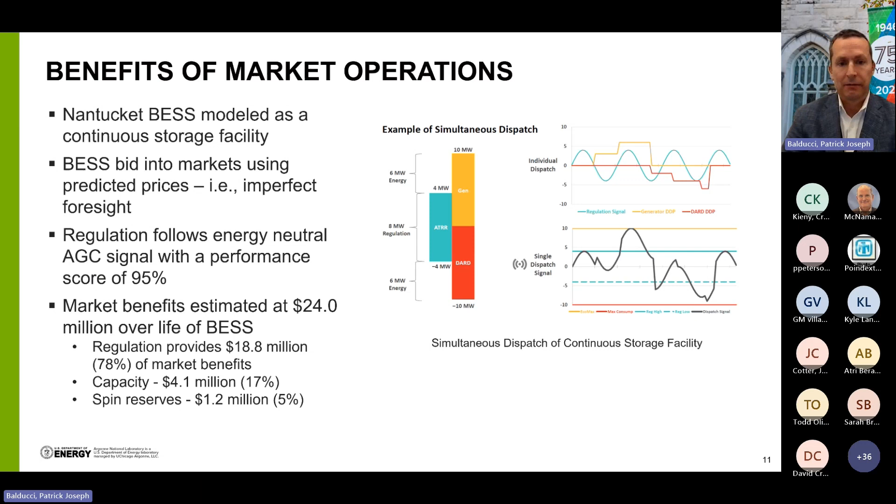Once again, the biggest use case was the transmission deferral use case, but also significant outage mitigation or reliability benefits, and also significant benefits associated with providing frequency regulation.

You'd be correct in noting that there are challenges to actually doing this because this would have been rate-based, but there are opportunities to propose these sorts of investments, and a memo had been issued by FERC, I believe, governing this investment.

We were basically defining the value proposition of pursuing this, with the idea of bringing value back to the customers through the reduction in future upward pressure on rates.

We've modeled the Northampton microgrid. Many of you are probably aware of the structure of the local charges that large commercial and industrial customers accrue in the Northeast and New England. If you can shave peaks and accurately estimate when distribution and transmission peaks occur, then through the ICAP and demand response programs, you can obtain significant value.

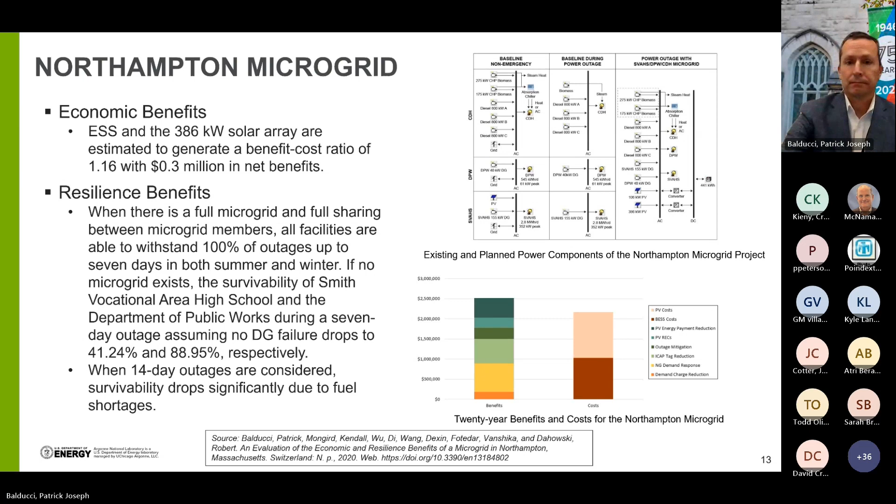Something we worked on—my team worked on when I was at Pacific Northwest National Laboratory—was taking an enormous amount of test data and then modeling energy storage. And what we found there, as I mentioned previously, is that not only is there...

Hey Patrick, just a quick time check—you've got about 5 minutes or so left, running a little short on time. Thank you, yep, absolutely. I'm going to wrap it up here in just a moment.

Not only was the round trip efficiency lower than what utilities were expecting when they deployed the systems, but it was highly variable and dependent on chemistry. For example, we explored vanadium redox flow batteries, and their round trip efficiencies could vary from say 60 to 85%, depending on the operation—the depth of discharge, whether charging or discharging, power output level, temperature, and state of charge all dramatically affected the efficiency rates.

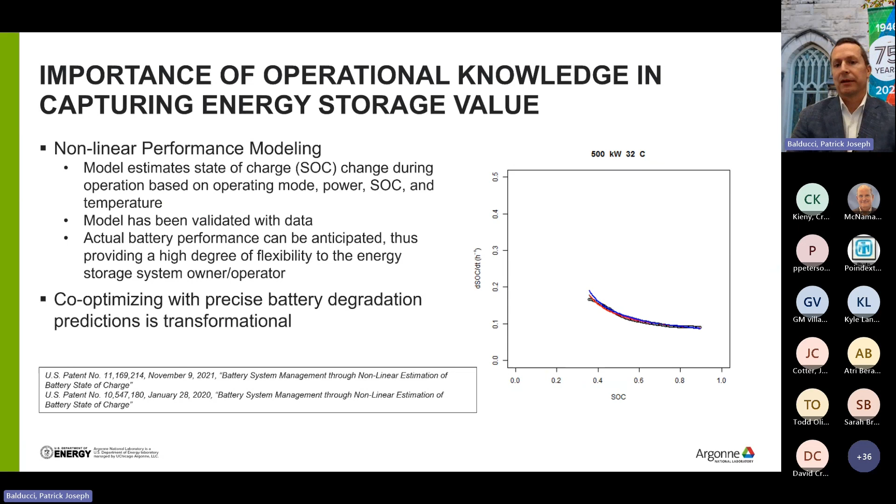This is just a note that we do get a pot of funds from the US DOE each year to evaluate novel energy storage deployments, to help utilities and other partners across the country expand the use cases for which energy storage is deployed and better understand the value proposition for energy storage combined with many other assets. We explore all of those things—we have this pot of funding. So if there are people in the audience with interesting energy storage projects who need help understanding the value proposition, there may be an opportunity for us to work together.

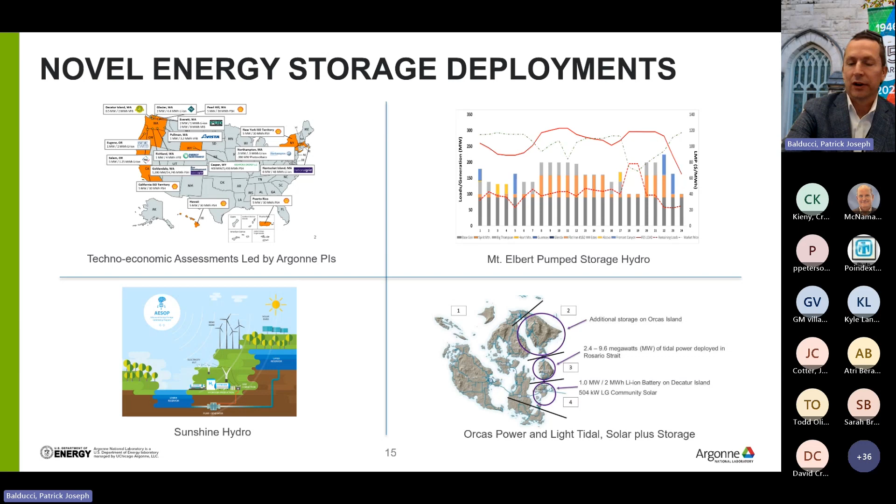The last 3 slides I'll just note very quickly. We have a suite of energy storage valuation tools, but in addition to Argonne National Laboratory, here are some energy storage evaluation tools from our sister labs and from EPRI: ESET, DER-VET, QuESt, and REopt Lite. Obviously ESET and DER-VET, of these 4 systems, are easily the most comprehensive in terms of use case coverage.

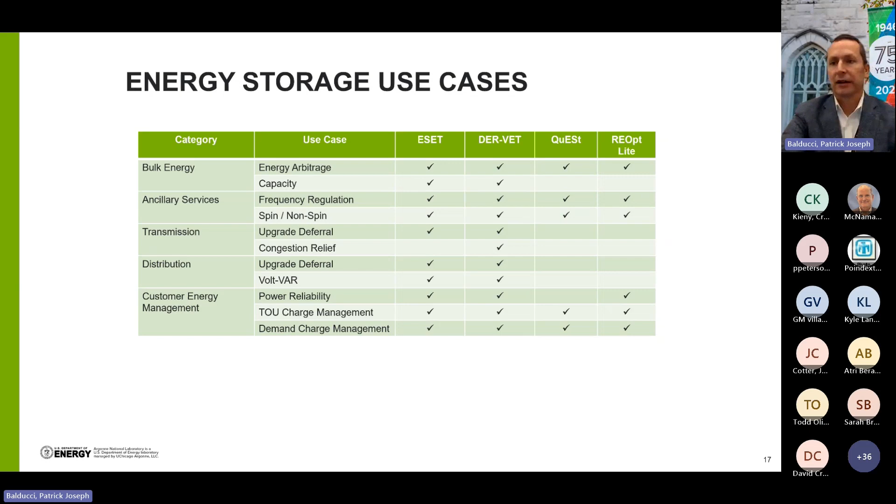QuESt is very good at exploring market benefits at locations around the United States, and they have a database that allows you to do so rapidly. The use case coverage is less, but of course market services are more limited than services that a vertically integrated utility would have. QuESt is very good for those market assessments, user-friendly, and the data is there for you. REopt Lite is really focused on microgrid assets.

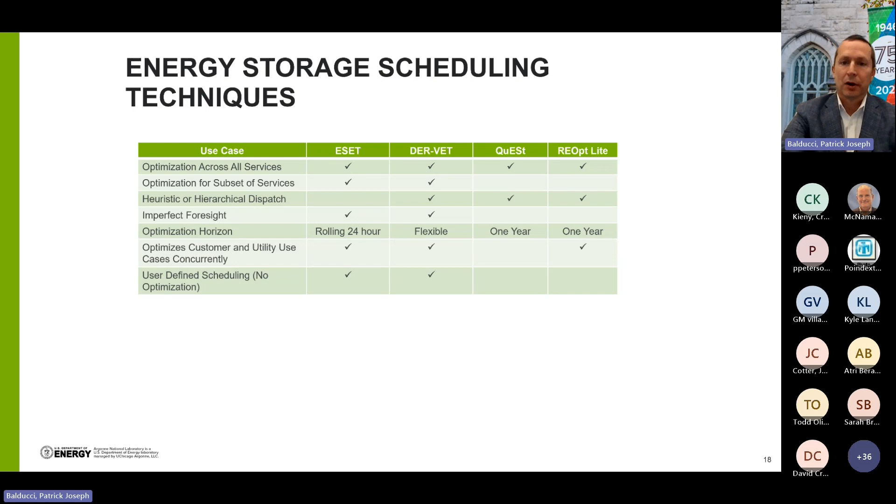So a microgrid evaluation tool—now ESET has a microgrid evaluation tool too, but if I had to focus on what's great about each of these tools, I'd say ESET and DER-VET are the most comprehensive in terms of coverage, QuESt for market analysis, and REopt Lite for microgrid evaluation.

So I've covered many of these, but these are some of our conclusions. Performing techno-economic assessments before you deploy energy storage systems is very important. We have found significant mistakes made by utilities that deployed them without performing a comprehensive techno-economic assessment.

It's important to consider a broad set of use cases, but typically in operation it's going to be a small subset of use cases. You simply are not going to provide 10 different services simultaneously. It becomes an intractable problem and difficult to manage.

There's significant regional variation, even within a region. If you're a co-op versus a vertically integrated utility versus another utility that's sitting in a market, or a military base with a microgrid, the value streams will look very different.

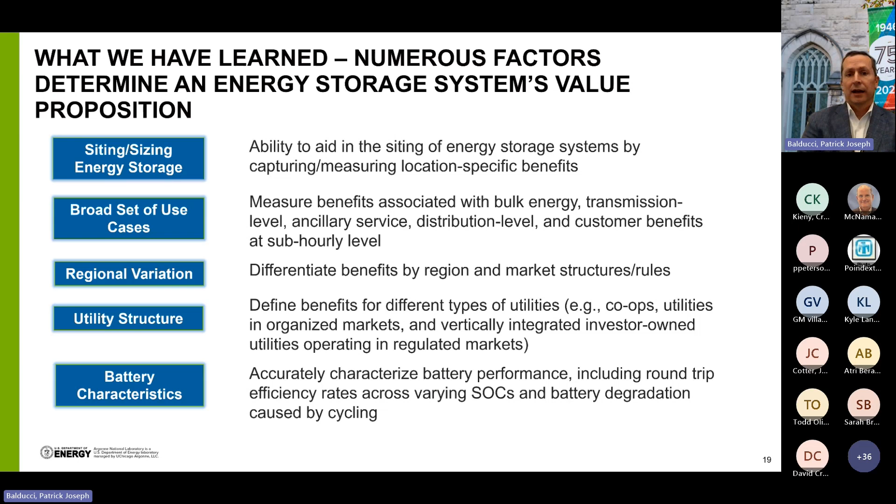Same thing with respect to utility structure. Understanding your battery performance and degradation is key to a positive outcome, because the economics are driven not only by the landscape of economic opportunities, but also the capabilities of the energy storage system and how robust it is. So these are all key considerations.